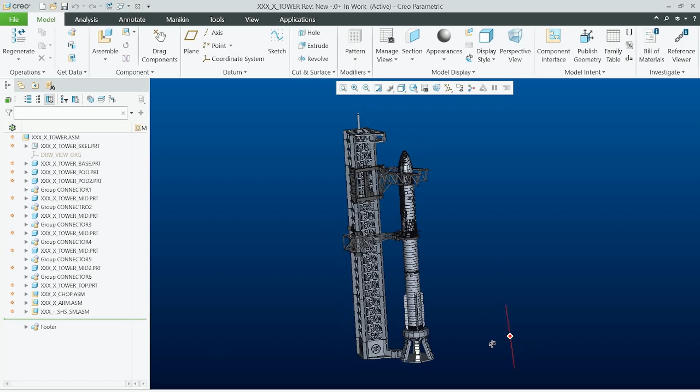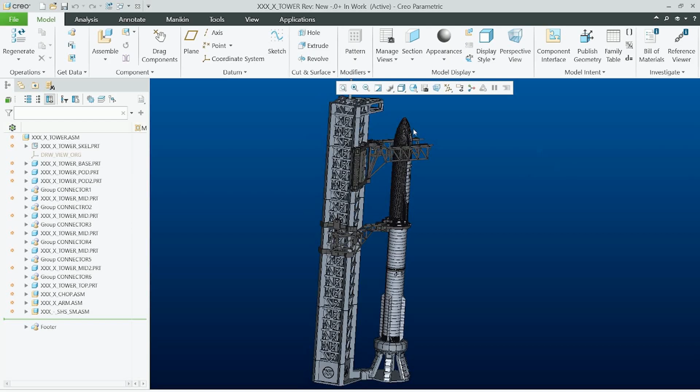And here we are in Creo, and this is the model. The model is roughly in 144 scale, and as you can see, it comes with the full tower, the arm, and the Mechazilla. Here we have the chopsticks, and it also has the launch pad in which the Super Heavy is sitting.

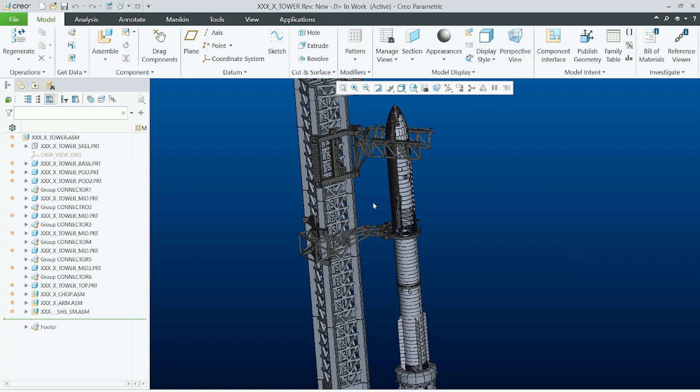I tried to be as accurate to the design as possible, but I did make some changes. Those changes were not done just because I wanted to, but to incorporate 3D printing and to make it all more stable.

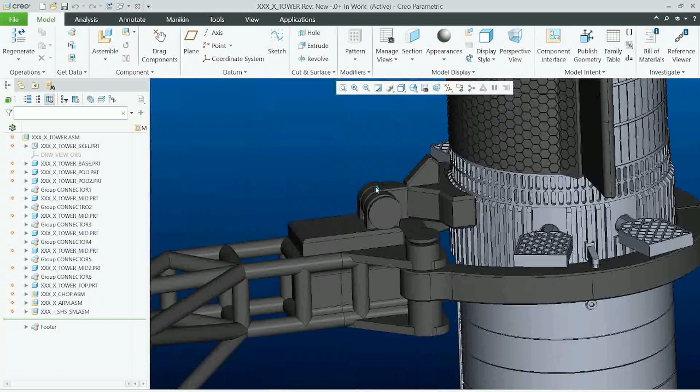So what do I mean by that? Here, as you can see, this arm has a locking mechanism so that the two grabbers can be fixed together. Then here we have basically a top grabber that will fix the booster in place and ensure better stability. Same here for the arm.

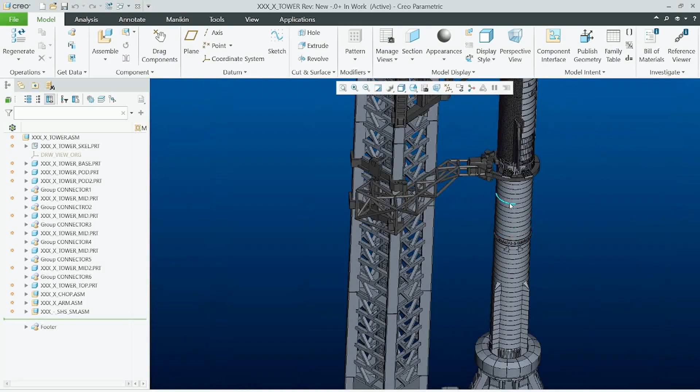I added this safety pin here. Once engaged, the entire arm is fixed in position, so it should never happen that the booster with the arm will fall down. I also redesigned the whole assembly for the arm so it slides on the tower with no problem. So here is the safety pin; when it is engaged, the arms cannot go down.

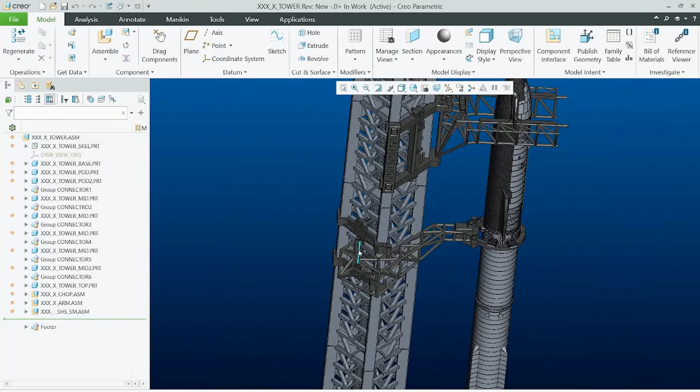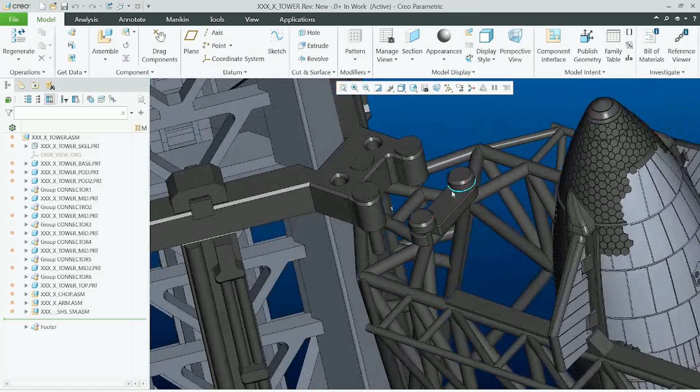And basically the same goes for the Mechazilla. I tried to make the chopsticks the same as they are, but I redesigned the whole assembly a little bit. First things first, here we have this safety piece that basically holds the two chopsticks together, so that the starship is safely secured. You can see it has two extrusions on both sides, so it's locked in place.

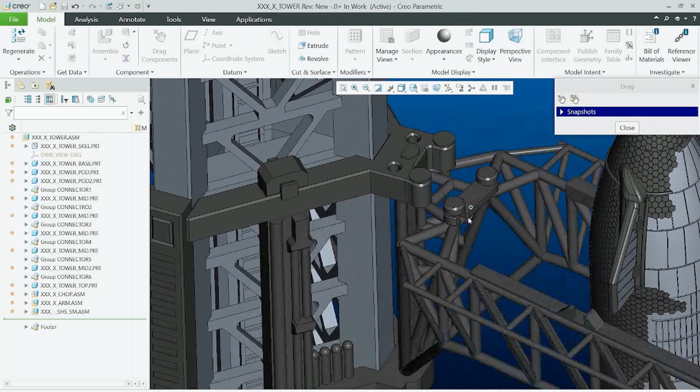The chopsticks can rotate, as you can see, but once again I have inserted two safety pins, just like on the bottom. So when they are inserted, the chopsticks cannot really rotate. If you remove them, you can rotate it as you wish.

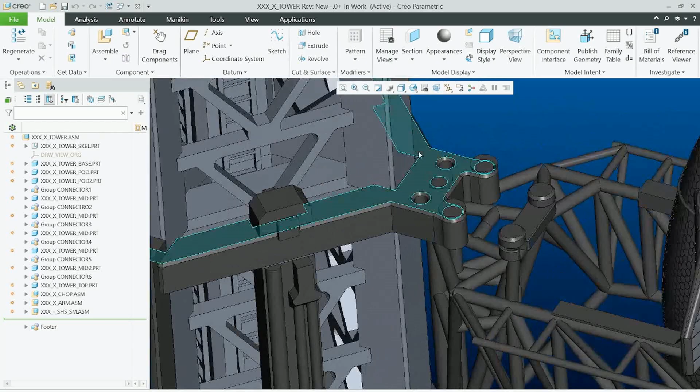I also prepared these two resting holes; they are for the safety pins if you don't want to have them in. And once again, the entire assembly can go up and down, and it has the same safety pins as we have here.

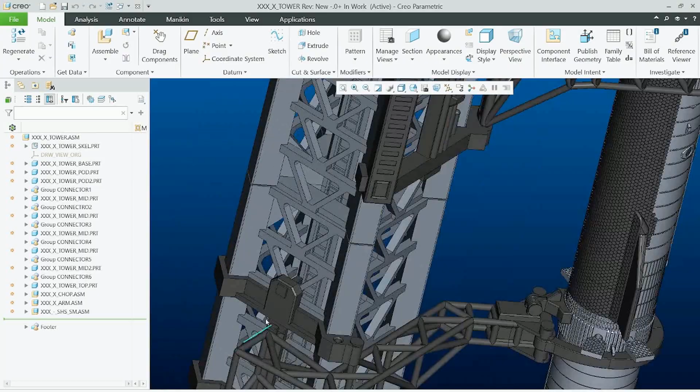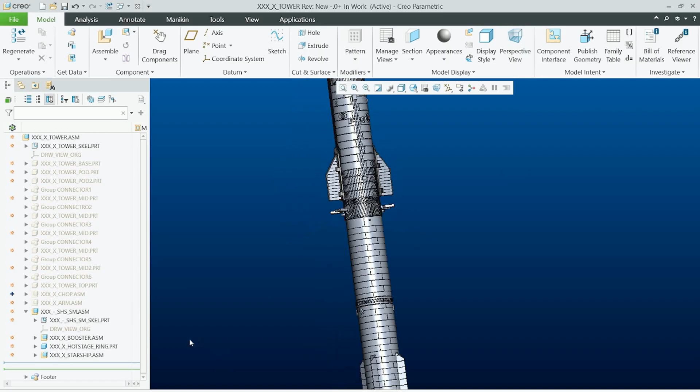And last but not least, the starship itself. I will now show the starship. So we have it basically made out of the starship, the booster, and the hot stage ring. The booster looks like this, and the starship looks like this.

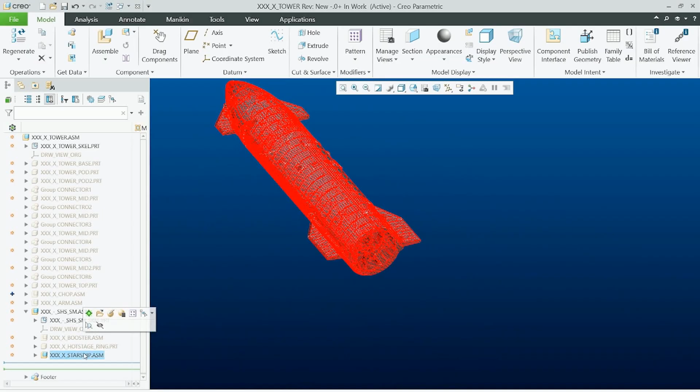You can see that I have made some protrusions and holes, and that's because in this case the hot stage ring serves as a connector between those two stages. So basically you will insert it inside the booster, and then you will insert the starship inside it, and the two stages hold together.

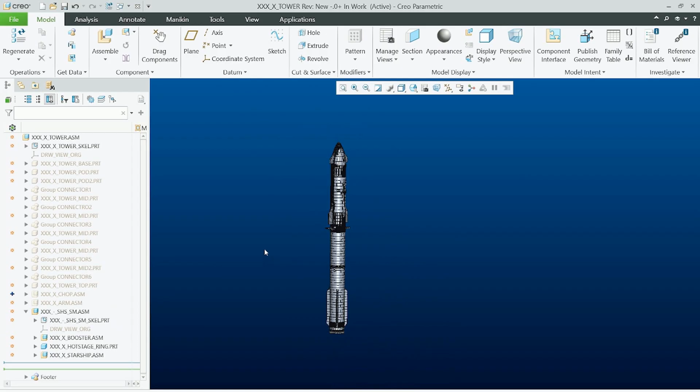It's not a perfectly tight connection, and it's not even meant to be, but it's just for when you want to have the two together.

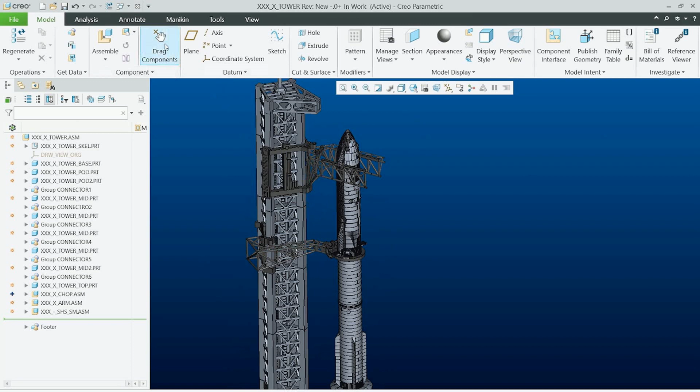Okay, so basically all the things regarding the arms and chopsticks are posable. Everything can move.

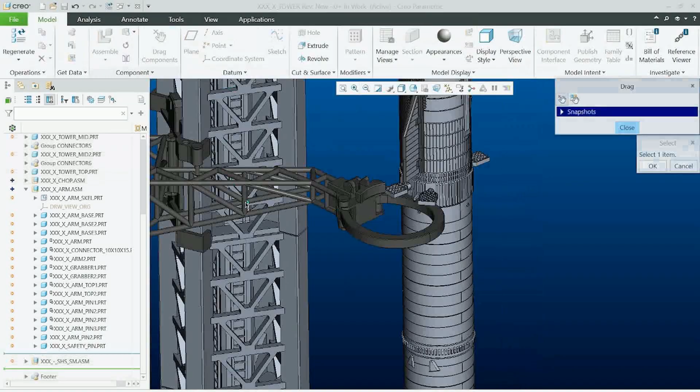So I will return it back to how it was, and the same goes for the Mechazilla here. And of course, if you want to simulate the catching of the booster, you can, because it fits here as well.

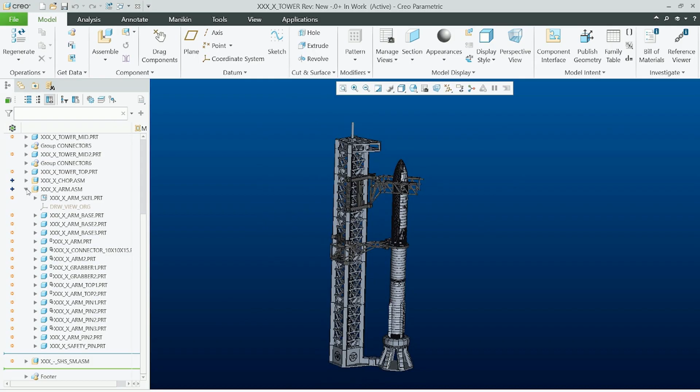Okay, so that was the showcase, and I think now we can take a look at how you will actually assemble everything.

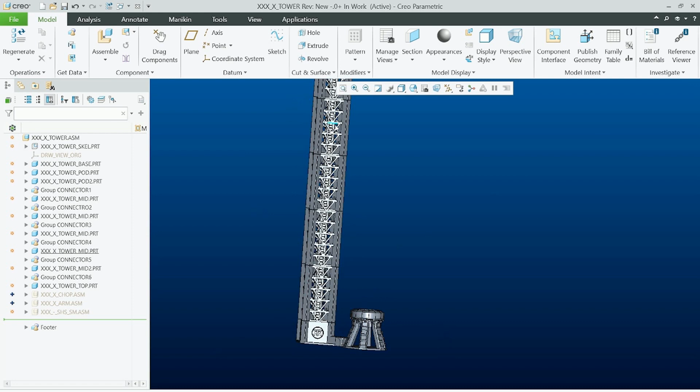So we will start with the tower itself. Bear in mind, this will be a very long print because it consists of four of these segments, and at least on the MK4, each of them is 18 hours apiece, because you really need to print it with supports.

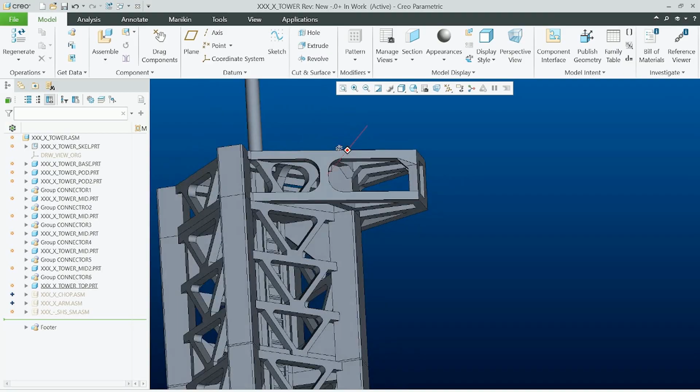I tried to print it without supports, but it always failed. I also tried to print the top without supports; I did print it, but for example this surface does not look good. I decided to keep it so I can demonstrate how even a failed print could be saved.

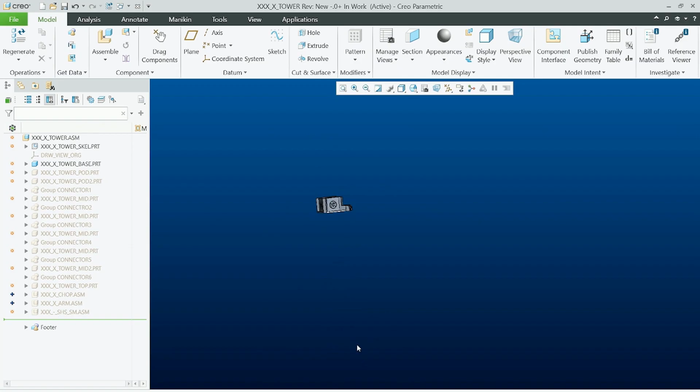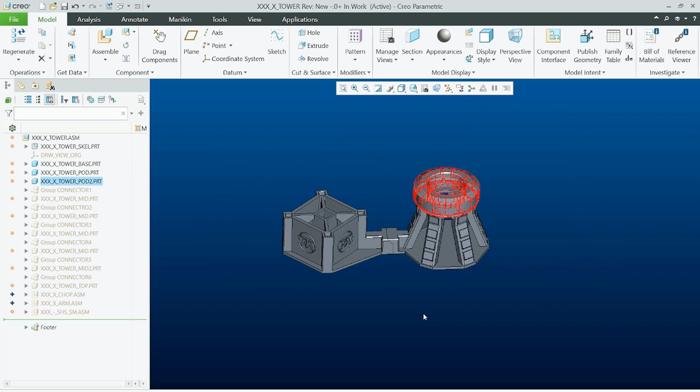Okay, and how does it work? Well, first we have this base, and as you can see here, we have a locking mechanism. So here we insert the locking mechanism — sorry, through the locking mechanism we insert this part of the pod, and the pod has the specs, and then you will insert the second part of the pod.

Now here we have holes for smaller pins and one big pin. So basically we will add these — four smaller ones and one bigger one — and we connect the middle part.

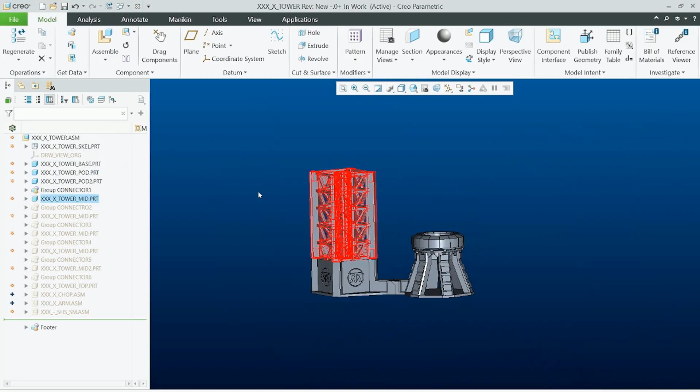And we do the same thing again: we will insert those same pins and add another segment, and we will do it until we have all four.

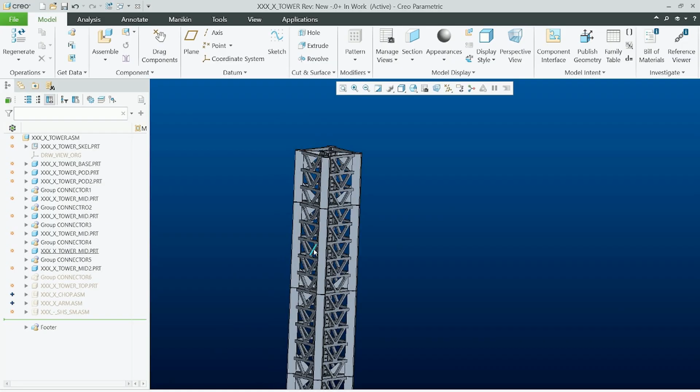And then we will insert this final piece, which is smaller — it only has three sections, as opposed to five. Once again, we will insert the same connectors and put the top on, and the tower is done. So this is the tower.

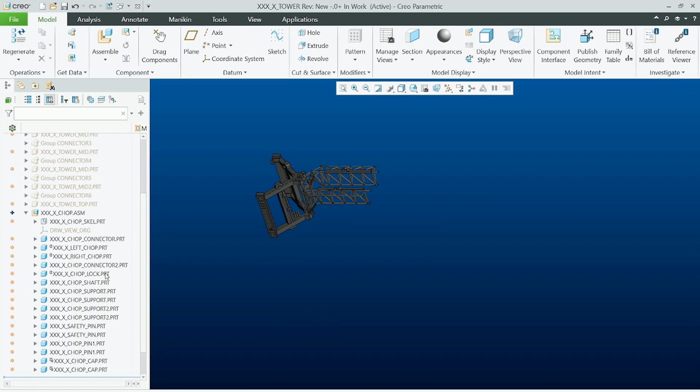Then the chopsticks. So we start with this piece. Then we will insert one part of the chopstick, then the second one, and we have to connect it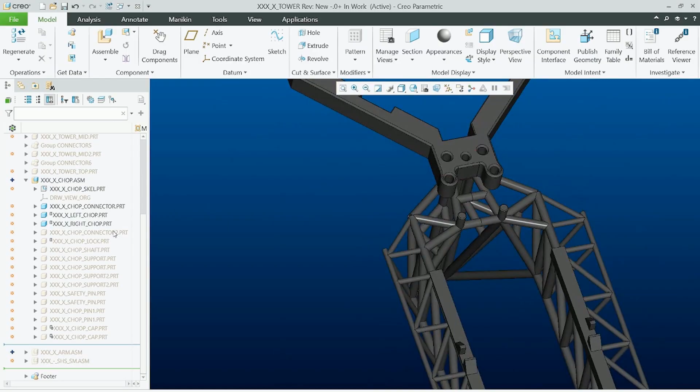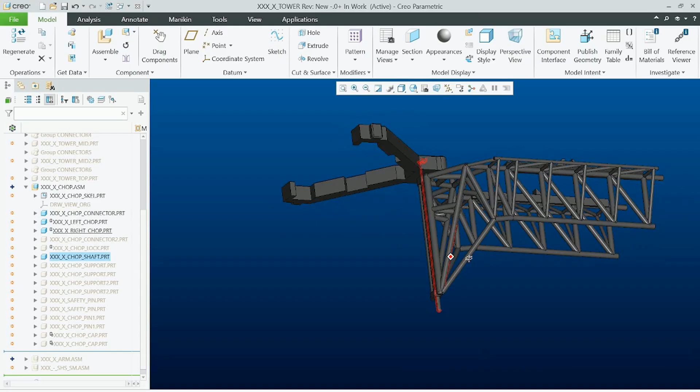via a shaft, which is here. The shaft is basically designed like this in order to be printed vertically, so that it's tougher and can really serve as a proper shaft.

Then from the bottom we will insert the second piece, and now to this pin we will insert this lock, so that the two chopsticks could be locked together.

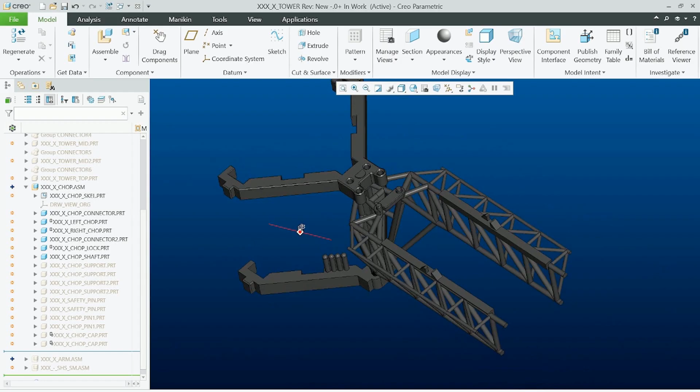Now we will close the assembly by adding a support. First we have this one, it will simply peg on it. These two pegs will go to the holes, like this.

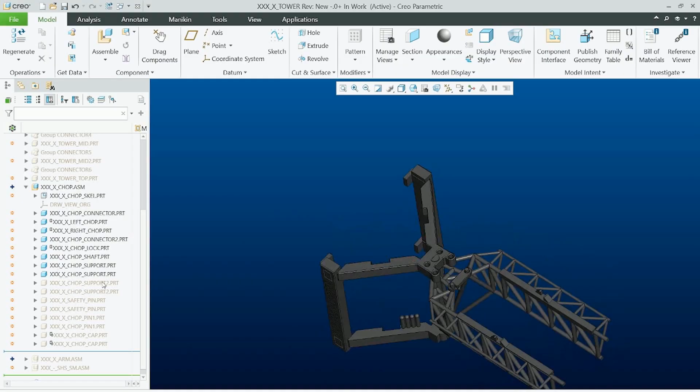Here we have these openings, and here we will insert another support, this and this. And we will have this.

Now we will insert the safety pins, this one and this one. Obviously, when you install it into the tower, the pins have to be removed or out of the way. And here we insert the safety pins to the chopsticks.

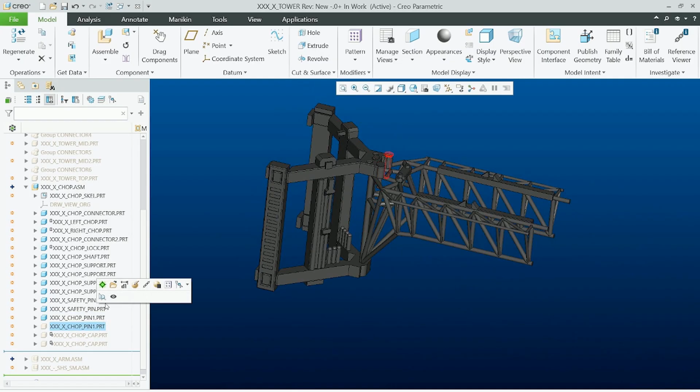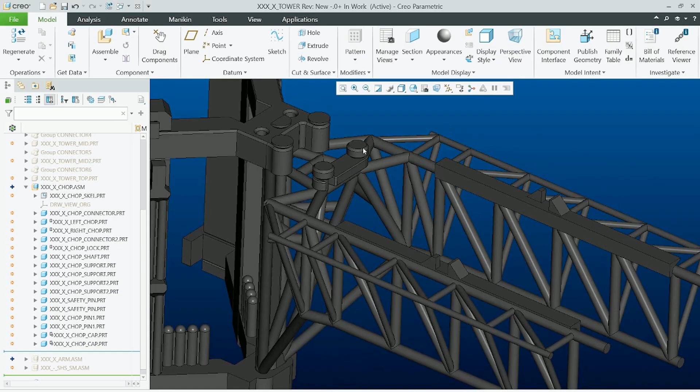And here we will insert a cap so that everything is nice. Here I have two, but in reality I only printed one and put it here because this one doesn't really need to be there. But yeah, I have it here.

Okay, so that was the chopsticks, and now the arm, and the arm is also very easy. So let's start, first we have this base.

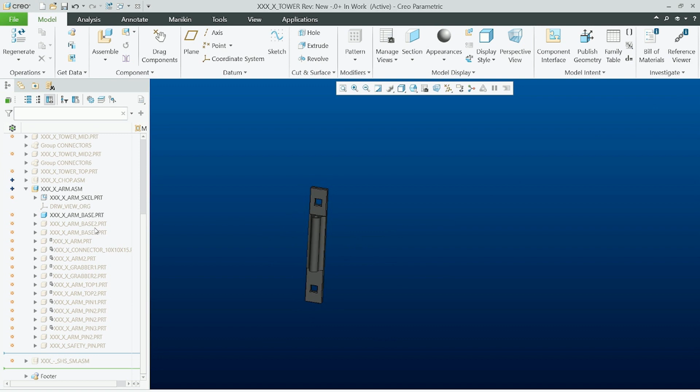Now we have this base 2 and 3. But we cannot just now put it together like that.

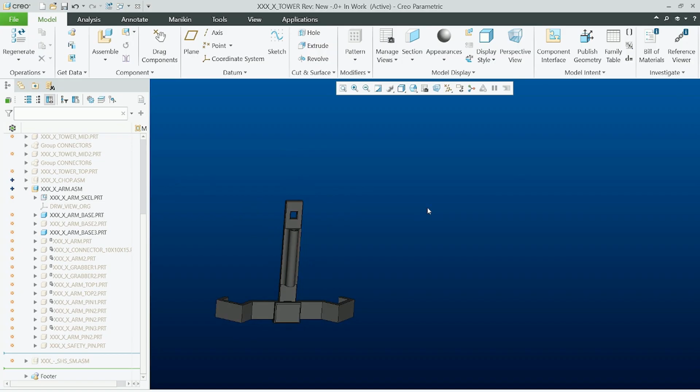Well, if you do it like me and just click everything together without gluing anything, sure, but basically the base 2 cannot be inserted now. First we have to insert the arm itself, and now we have to align the holes and insert

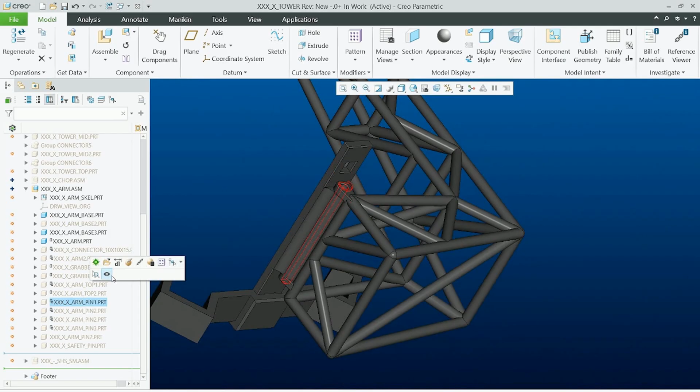the shaft. Here we have the pin, so we will insert it. It's once again cut like that so that you can print it vertically. So we will insert it, and now we can insert the base too.

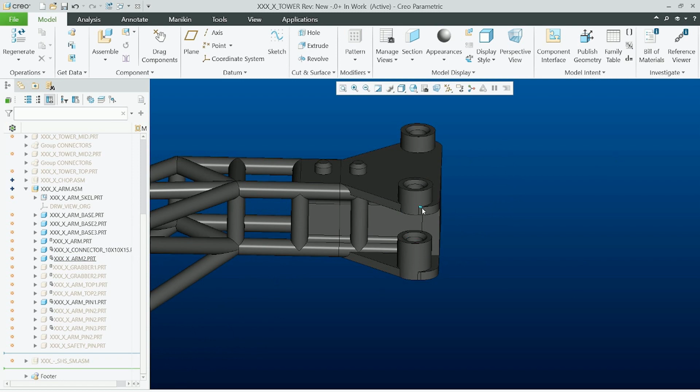And have it like that. Now here we have a hole for a connector, so we will insert it, and we will insert the second half of the arm. And now here and here we will put the grabbers 1 and 2.

For example, here I have the locking mechanism on the bottom. In real life, I made it upside down, so it is up, but it doesn't matter, it has no bearing on the function.

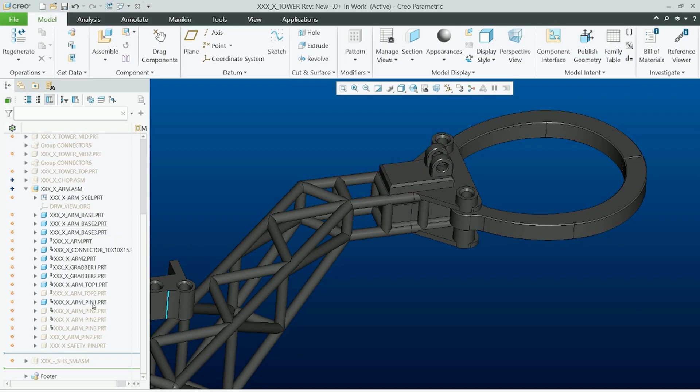And here we have the two pegs, so we will insert this piece, and inside we will insert this part. Now we will insert pins everywhere.

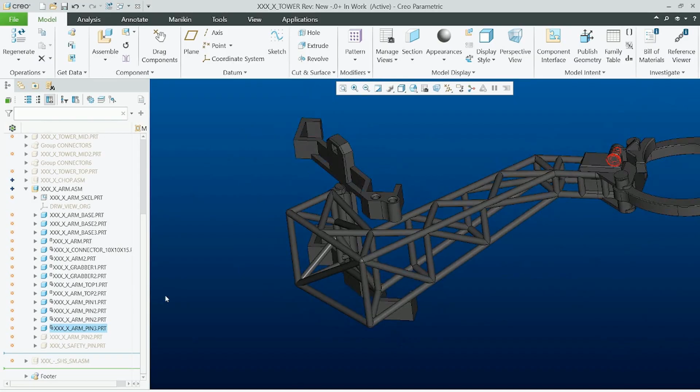So one pin here, one pin here, one pin here, and now here we have this safety pin and this safety pin, and that's it. Once again, we have to remove this safety pin before we attach it to the tower.

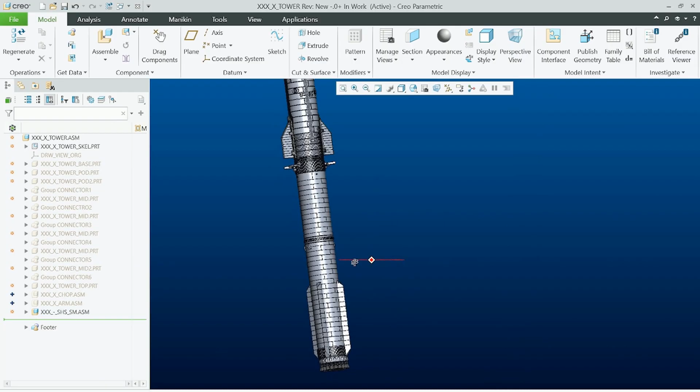And last but not least, the Super Heavy Starship itself. So this is probably the simplest one. We will start with the booster, which looks like this.

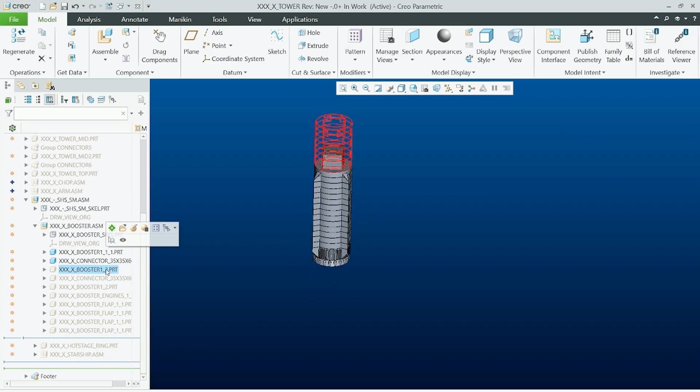We start with this piece. First we insert this connector. Then we will insert the second part, another connector, and the top part.

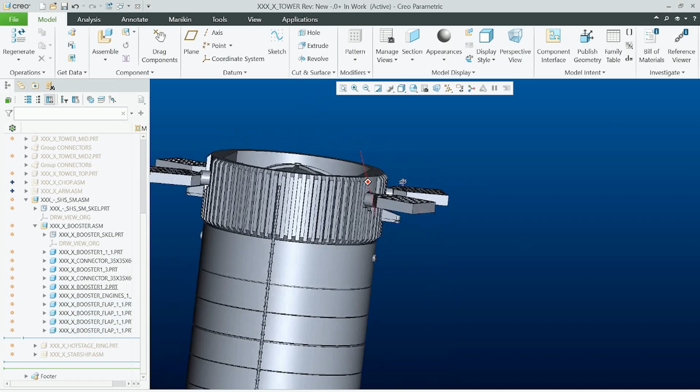Now here to this opening we will insert the engines. And now here to those four holes we will insert the flaps. The flaps are kind of redesigned in order to have this surface so that they can be printed like that.

Okay, so that's the booster. Now the starship itself, which is here.

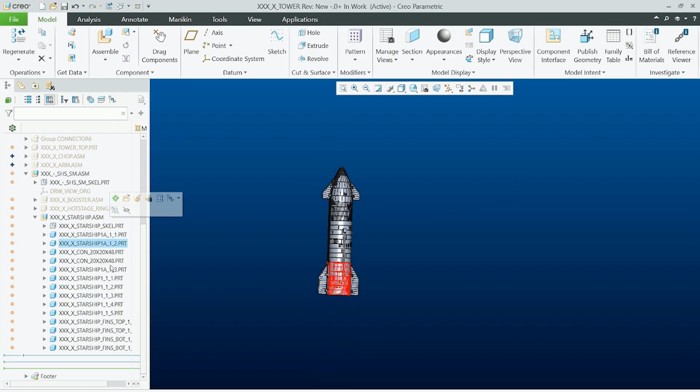So first we have this piece. Now we have this back piece. We will insert the connector here, we will insert the connector here, and we will put the center piece together. And we have this long piece.

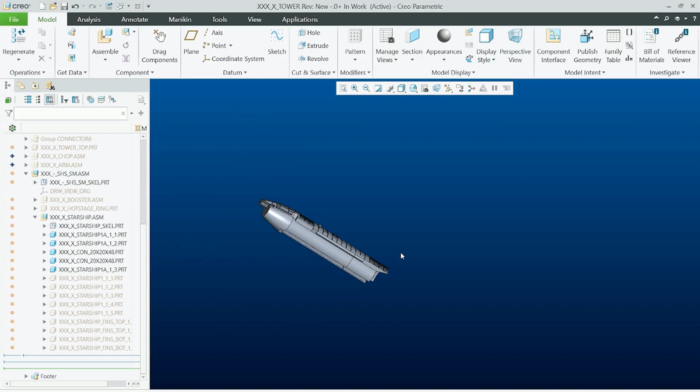Now we will start with the heat shield. We will insert the top one, you basically slide it from the top and it will hold together here with this locking mechanism.

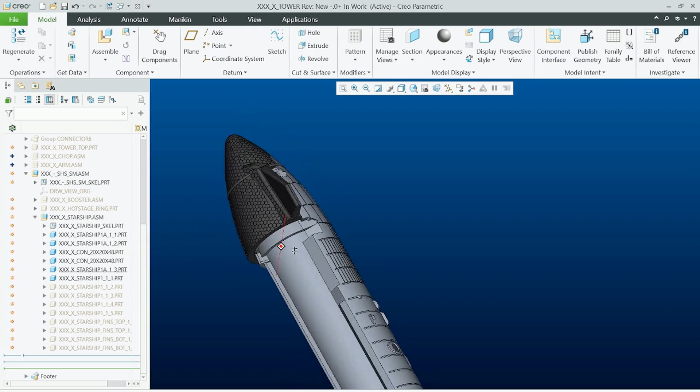Then we will insert this. It's basically better if you first take this piece, then insert the heat shield. Then you take this piece, insert the heat shield, and then put them together.

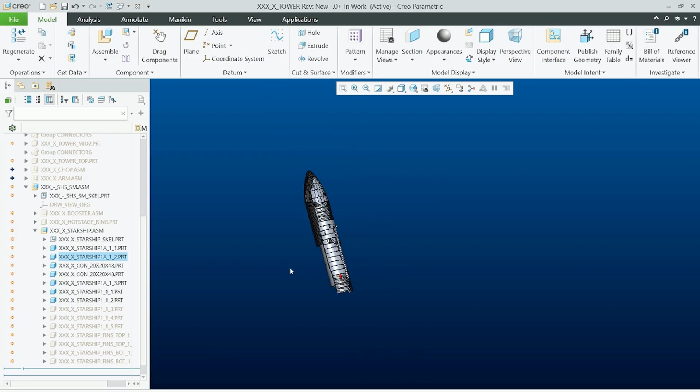So here, this thing, and then from the back you will attach this piece. Here we have the back, and the piece has a corresponding hole, so you have this.

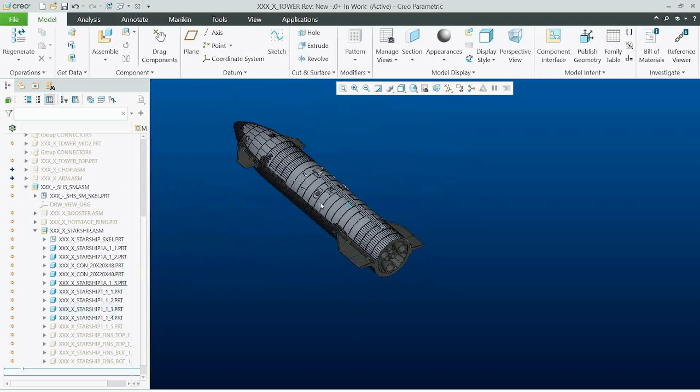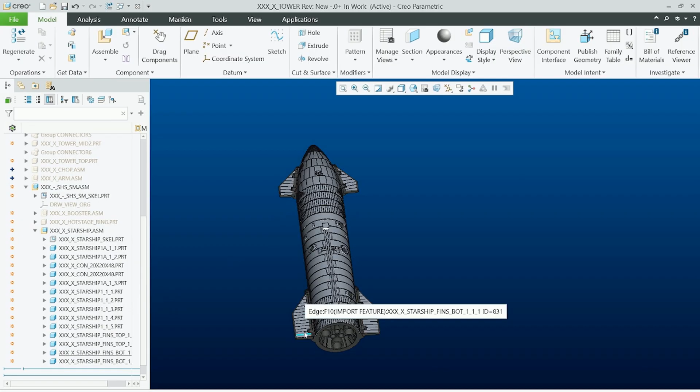Now here to this small opening on both sides you will insert these small parts of the heat shield, and now to all four fins you will simply insert this. They can be clicked together, but it may be needed to add a little bit of glue.

And that's it, that's the Starship entirely done. Then we will insert the hot stage ring and the booster. So that's the model.

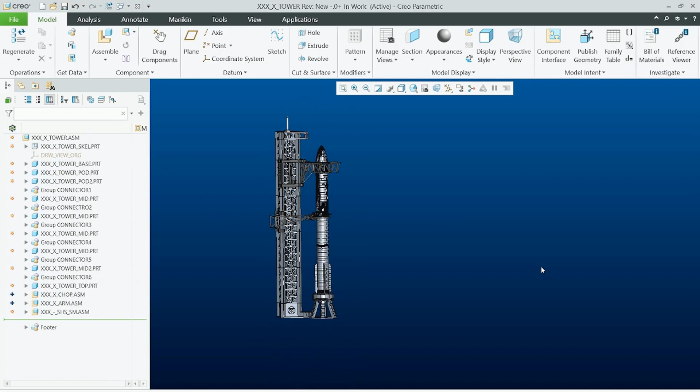And this will be all for this video, because on the actual print we will take a look in another part. So I hope you liked this and that the assembly instructions were clear enough.